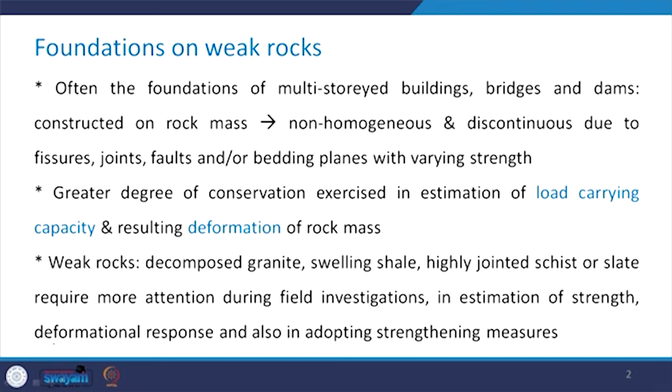Weak rocks can include decomposed granites, swelling shale, highly jointed schist or slate, and such weak rocks require more attention during field investigations in the estimation of their strength and deformational response, and also in adopting strengthening measures.

Generally, the bearing capacity of rocks is more than that of soils. So when I write that bearing capacity of rocks is more than that of soil, I am talking about the bearing capacity of foundations on rocks being more than the bearing capacity of foundations on soils. Compressive strength of intact rock varies from 1 MPa to more than 200 MPa, and we have seen such things in detail in some of the earlier chapters of this course.

You all know that due to the presence of defects in rock mass, the compressive strength and the modulus of the rock mass is much less as compared to that of the intact rock.

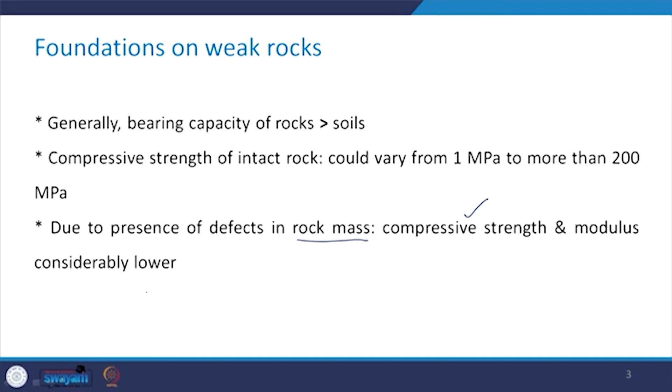Compressive loads from these structures, whether vertical, inclined or horizontal, have to be transmitted to the rock mass through individual spread footing or strip footing, or mat foundation, or it can be caisson or pile shaft and its tip.

Suspension bridges, strengthening of dams, and in order to take care of uplift pressures in deep mat foundations for buildings in dry docks, these tensile loads are applied to the rock through anchors.

So you see that all compressive loads are to be transmitted to the rock mass through individual footings, which can be shallow footings or deep footings. However, in such cases where you have to take care of uplift pressures in strengthening dams or suspension bridges, tensile loads are applied to the rock through anchors.

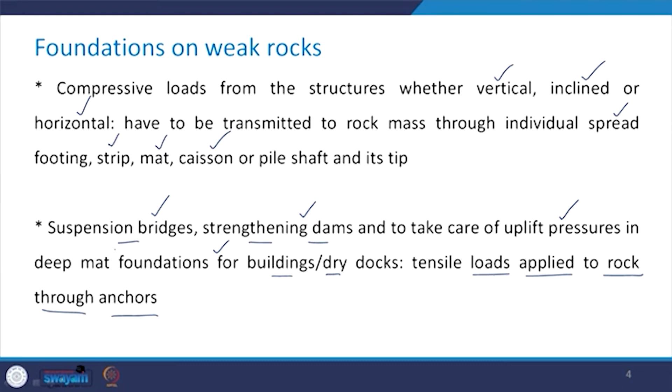Now, when the spacing of the joints is very wide, which spacing do we call very wide? That is the spacing which is more than 5 times the loaded width. In such cases, the bearing capacity of the individual footing or the pile tip can be estimated as that of an intact rock using the classical theories which we have in case of soils.

However, in case of heavily fractured rock with close spacing of joints, unlike the previous case of very wide spacing, this case can also be treated as a dense granular mass, and all the theories relevant in case of soils will be applicable in this case as well.

The main problem with rock mass is the collection and testing of large specimens in the lab or field in order to estimate their shear strength parameters, and we have seen all these problems when we were discussing the laboratory testing of rocks.

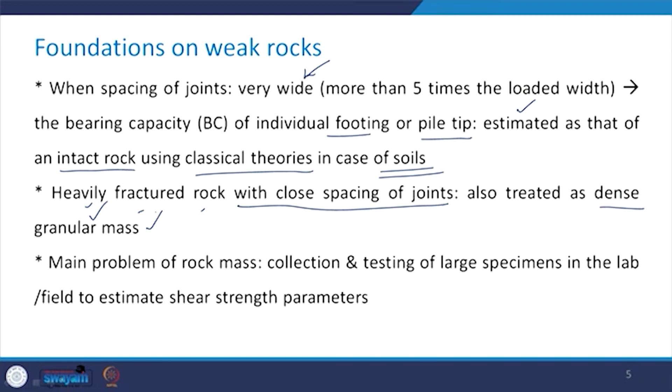It is really not possible to carry out some of these tests on the specimen of the rock mass, and you saw how we obtained the Mohr-Coulomb parameters under effective stress condition by taking the help of Hoek and Brown parameters. Now, when the foundation mass is likely to fail in shear along a combination of 2 or 3 planes of weakness, the stability is assessed by considering the summation of shear strengths to the summation of shear stresses developed along all these planes.

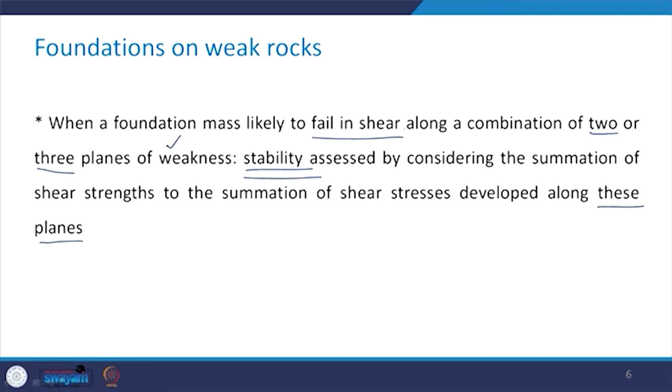Why do we say that the stability is assessed by this? You are aware that when we talk about stability, we try to get the factor of safety. How do we obtain the factor of safety? That is the basic definition: the ratio of strength to the cause which is responsible for inducing that kind of failure. So if the failure is going to take place along more than one plane of weakness, then we have to consider the shear strength and the shear stresses developed along all these planes when we try to assess the stability.

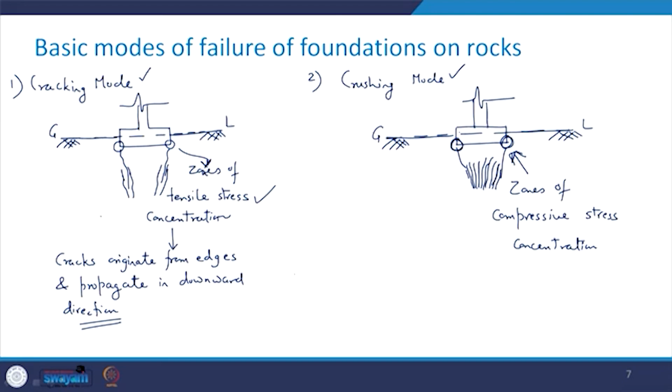So what is the difference between cracking mode and crushing mode? In case of the cracking mode, there occurs zones of tensile stress concentration and the cracks propagate. In case of the crushing mode, these are zones of compressive stress concentration and the failure takes place accordingly. Then the third mode is the wedging mode.

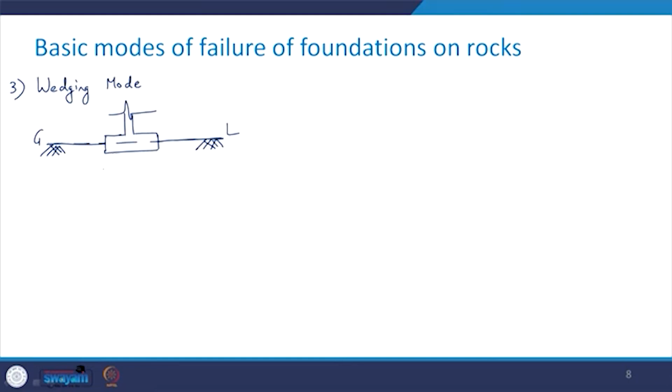As the name suggests, in this case there is the formation of a wedge below the footing. So say this is your footing, and this level is ground level. There is going to be the formation of this kind of wedge which will be extended on either side, and this is how at the center it is going to be, and here on this side it is going to be this kind of shear which is developed. So in this case there is going to be the formation of a wedge.

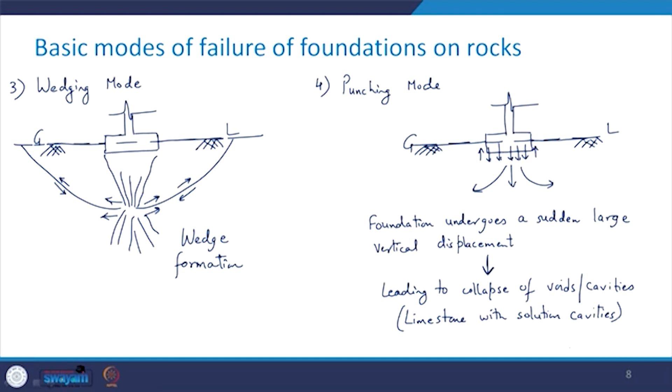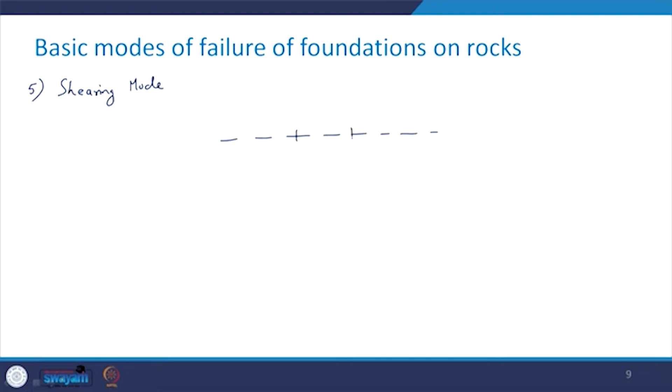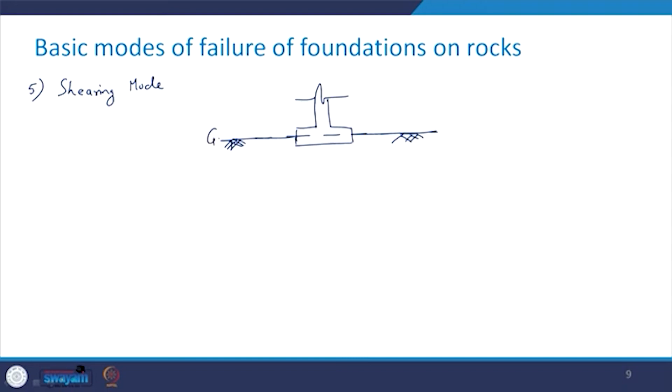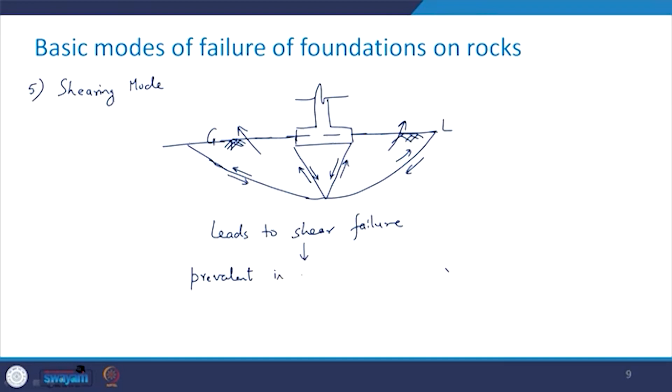This is quite relevant in case you have limestone with solution cavities. So such type of failure mode is the punching mode. Then the last in this category is the shearing mode. Let us have the footing once again. So this is your ground level, and you are going to have this kind of situation. In this case, this leads to shear failure. This is prevalent in rock masses with very close joint spacing. So these are the five basic modes of failure of foundations on rocks: cracking, crushing, wedging, punching, and the shearing mode.

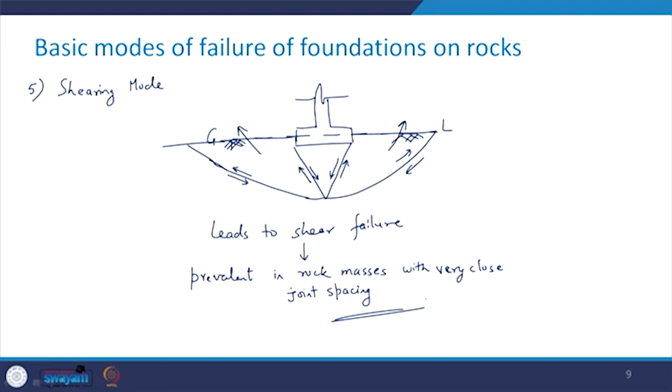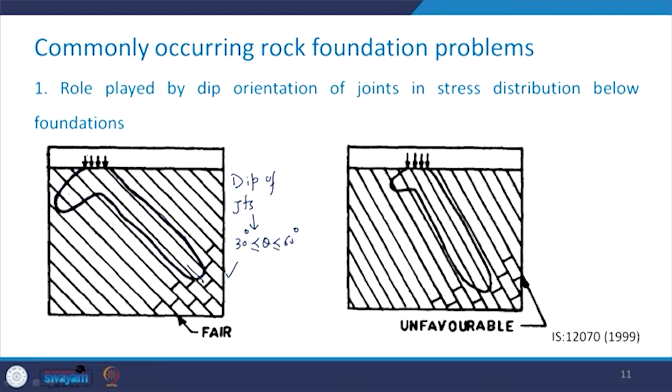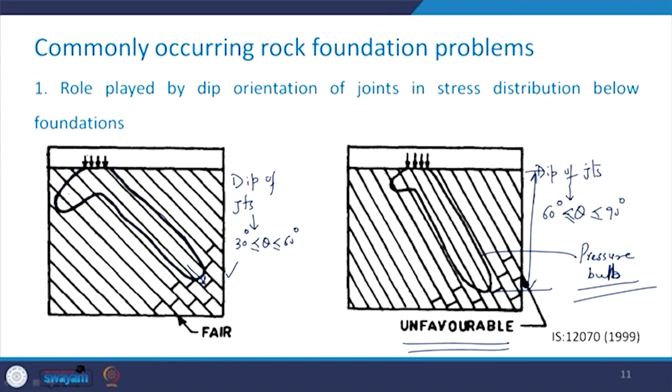Okay, so in this case the dip of the joints is between 60 degree to 90 degree, and you can see this is quite an unfavorable condition, and this is the pressure bulb in this situation. So as the dip of the joint increases, the depth up to which the pressure bulb develops below the foundation is also increasing. So this is an unfavorable condition.

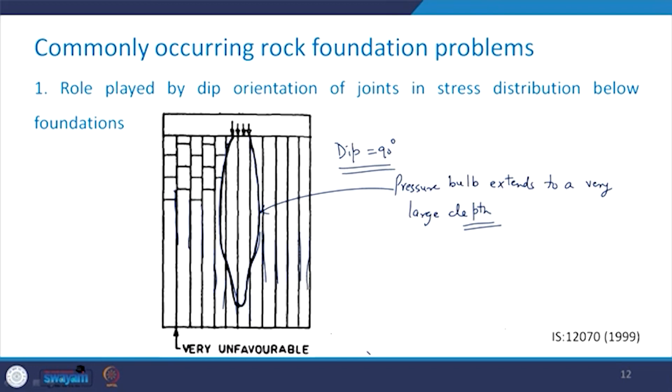So this is the most unfavorable condition for the foundation to be resting on such type of rock mass. This is how the dip orientation of the joint plays an important role in the stress distribution. You have seen that as the dip of the joint increases, the pressure bulb extends to a larger depth.

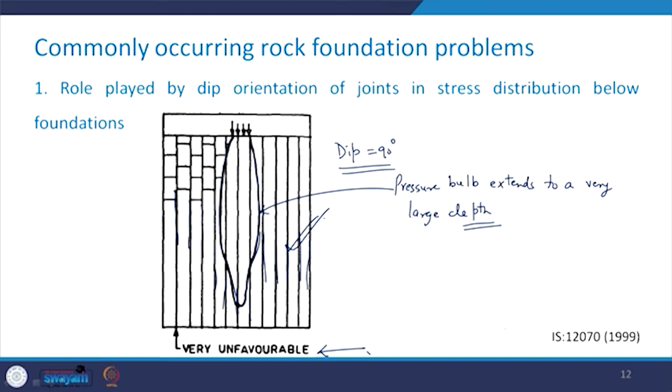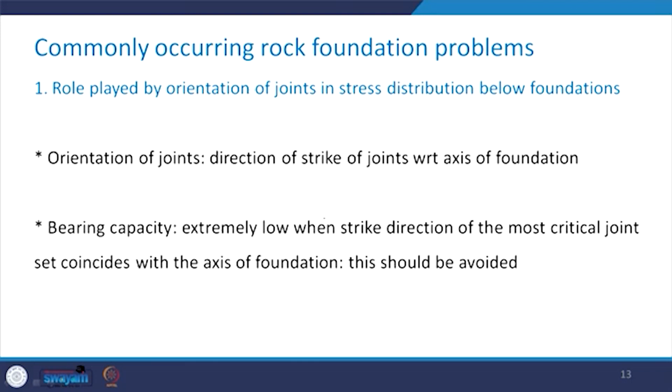Orientation of the joints is the direction of the strike of the joint with respect to the axis of the foundation. Bearing capacity is extremely low when the strike direction of the most critical joint set coincides with the axis of the foundation, which we have seen as a very unfavorable condition, and this should be avoided.

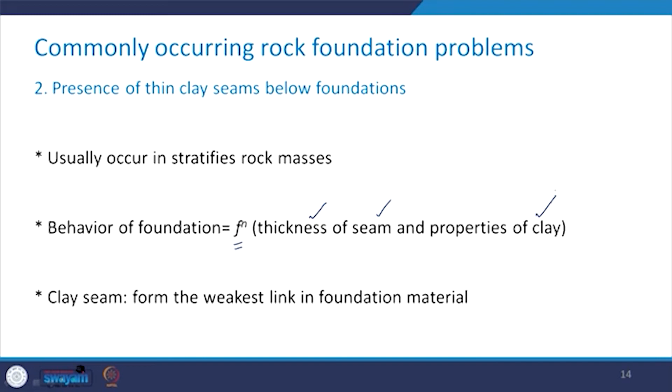The second commonly occurring rock foundation problem includes the presence of thin clay seams below the foundations. These usually occur in stratified rock masses, in which case the behavior of the foundation is a function of the thickness of the seam and the properties of the clay. This clay seam forms the weakest link in the foundation material.

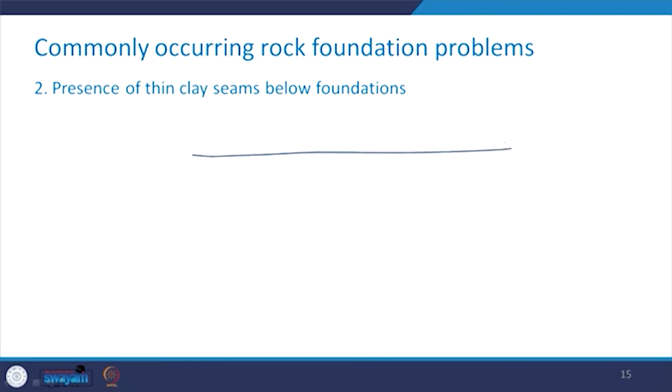Let me draw a figure and try to explain what we mean by this presence of a thin clay seam below the foundation level. Let us draw this foundation first. Say it is a surface footing, for example. Now the load is transferred like this, and say here you have the joint sets, and on this portion here, this is the clay seam which is present.

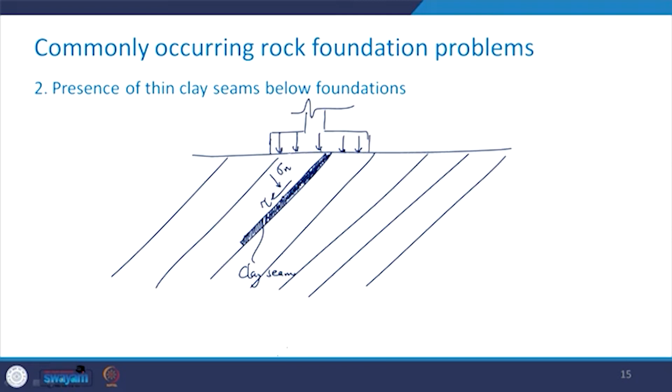So this is the clay seam, and along this you will have a shear stress, that is tau, and normal to this you will have sigma n. Now what happens when this clay seam is there? This gives rise to the failure of this clay material which is there in the seam if this tau is more than tau f for the clay.

Now what happens if such a situation is there? First of all, the major slip along the direction of the seam takes place, and a large vertical settlement along with lateral displacement takes place, and this causes a significant problem in case this clay seam is present below the foundations.

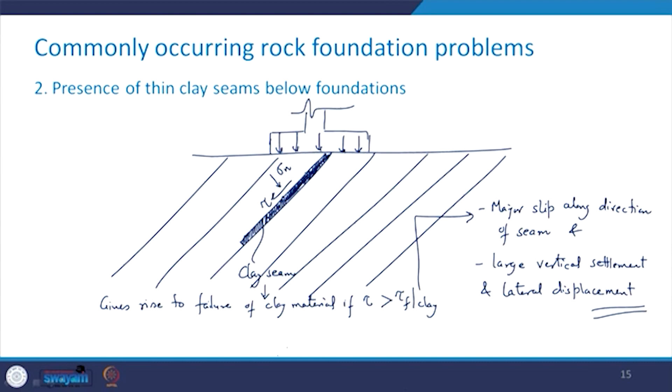Another commonly occurring rock foundation problem includes the presence of shear zones below the foundations of major structures like gravity dams, arch cum gravity dams, or nuclear reactor buildings and large diameter silos. Let me try to show you with the help of a figure, in case of a gravity dam, where there is a presence of the shear zone.

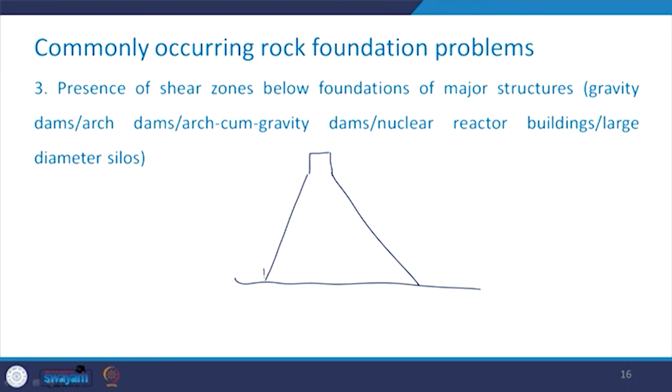Say the width here at the base is B. Obviously, the pressure bulb is going to be there, and say that there is the occurrence of this shear zone, like this. So again here you will have the shear stress and the normal stress in this case, that is sigma n.

This is your rock mass. Now there is going to be the presence of the vertical as well as the horizontal force, and say that the horizontal force is H and the vertical one is V. So this H would include the hydrostatic pressure

plus the silt pressure, plus you can have wave pressure, or there can be the presence of seismic pressure. Because of that also this horizontal force can be caused.

If the tau in the shear zone, which has been shown here, is more than tau f, what is going to happen? There is going to be very large displacement of the body of the dam.

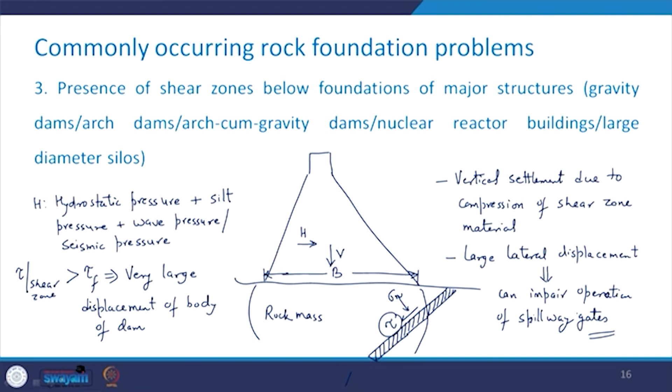So this is how the presence of shear zone is going to create the problem for the dam foundation case.

Coming to the fourth one, in case if you have the presence of the geological faults or fault zones, then also it creates problem related to the foundations which are to be founded where such geological structures are present. Let us try to have a look at how this influences.

So say this is your ground surface, and here you have the fault. And in the neighboring region I have fault zone. So this is what is the fault, which is the open fracture, and this one is the fault zone. So what happens in case of the fault plane?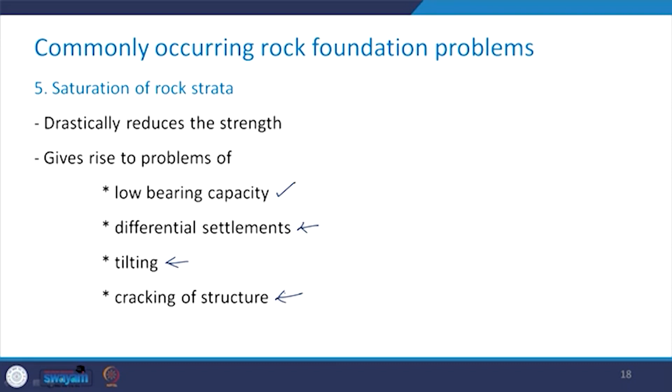Then in case if you have the foundations on slopes or foundation in the hilly terrain, these are associated with slope stability problems. So these also create the problems for the foundations.

So in case let us say that this is how the situation is here. This is what is your ground surface. And say here you have some kind of a structure that is going to come up, and for that structure here is the foundation system.

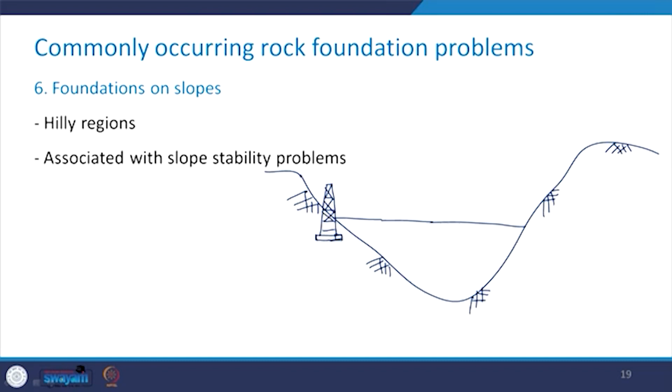So say this is what is the tower, and then you will have here as the anchor block, and say here you have the river. Some superstructure is there.

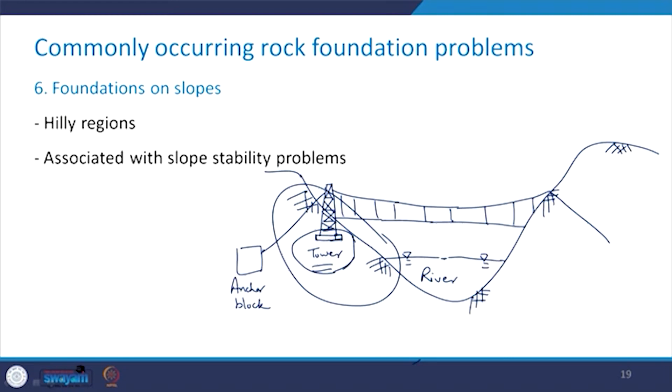So you see that whatever are the foundation for this tower, they would be treated as foundations on slopes. So there we need to be careful that this slope itself should be stable, and all those problems which are associated with the slope stability issues, they are going to be the problems here in case of the foundations for, let us say, this tower structure.

So, in case if the foundations on slopes are there, they also create these problems for the foundations on the rocks. So these were some of the common occurring types of problems that may occur. So, having this background of the effect of the joint orientation and the other associated problems related to foundations on rocks.

Now, we are ready to learn how to determine the bearing capacity of the foundations which are to be constructed on the rocks or rock masses. So, that we will take up in the next class. Thank you very much.